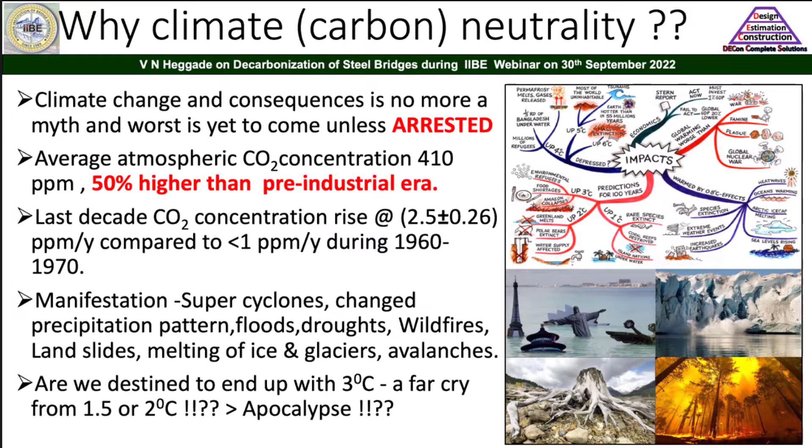So all of us have to get geared up and overcome this problem of carbonization, which is leading to global warming and thereby these disastrous manifestations. How to avoid that? We'll have to work on that. Now, let's have a look at carbon dioxide emission to the environment. The data varies across the world; different sources give different data. We are particularly concerned about the construction sector.

If you collect the data all over the world from different sources and average it out, around 12.75% can be attributed to the construction sector, out of which cement contributes around 3%, steel around 2.75% to 3%, other building materials 1.25%, and utility, end of life and beyond, around 5.75%. In addition, energy used in buildings for operation, like water supply, vertical lift movement and so many things, contributes to the carbon footprint, meaning carbon emission to the environment, of 17.5%.

In the world, India ranks almost third in emissions. If you look on the right hand side, China ranks first, the United States ranks second, and India comes with 6.6% of overall carbon dioxide emission to the environment. You can have a look at it. But per capita, the carbon dioxide emission as well as the energy consumption in India and China is lower compared to that of the United States, because our population is very high.

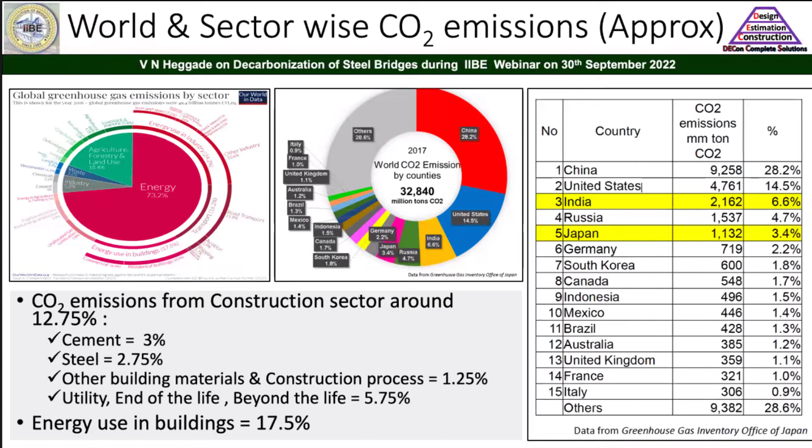So if you look at the per capita, it may not be very high, but if you look at the absolute gross carbon dioxide emission, India ranks at around third in the world. I think it's a matter of concern for us.

But those commitments, which were made in COP 21, were revised in the next meeting which took place in 2021 in Glasgow, that is called COP 26, where our Prime Minister very famously gave the Panchamrita, that means 5 panaceas to carbon neutrality, to achieve carbon neutrality by 2070.

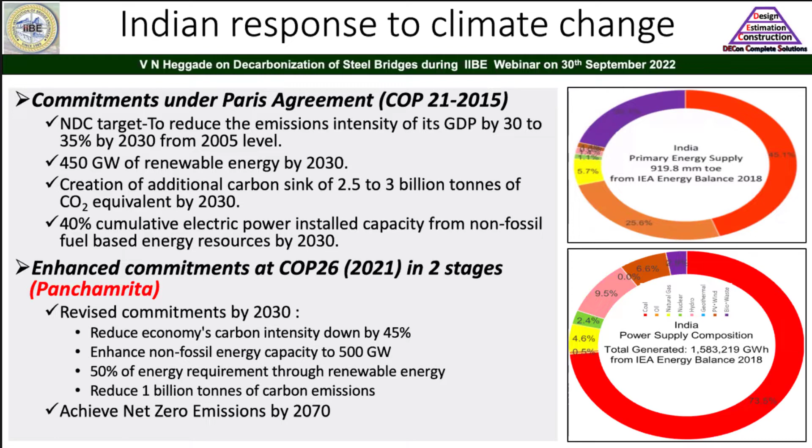And those 5 panaceas are here, like reduce the economy's carbon intensity by 45%, and he proposed it in 2 phases. In fact, by 45% in the first phase, that is by 2030, and complete carbon neutrality by 2070. This is overall from the Indian perspective. It's not only meant for the construction sector, it's for all.

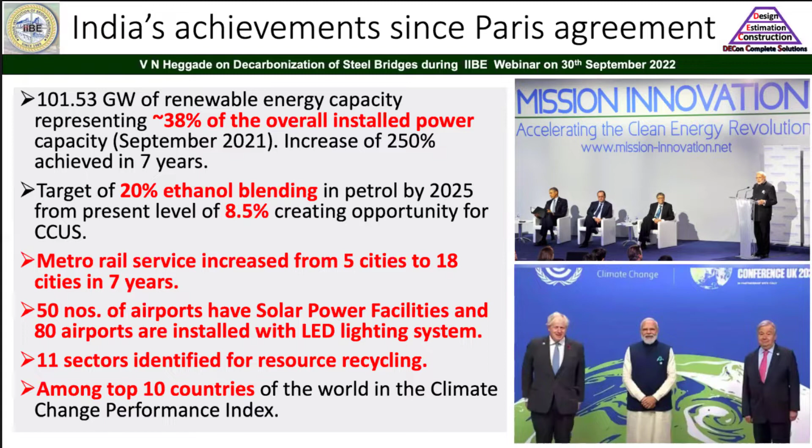But very interesting and very exciting for our Indian subcontinent is that whatever we had promised in Paris, that is in COP 21, we could make quite a lot of progress in the achievement of carbon neutrality. And we ranked among the top 10 countries in the world. I think that's a credit. And India is on the right path of achieving carbon neutrality as committed by our Prime Minister by 2070.

Now let me give the background, because before getting straight into how to decarbonize steel bridges, let us understand what we are talking about, carbon emission. What does it mean? There are 2 types of carbon. One is called the operational carbon, and another is called the embodied carbon.

Carbon emission or the global warming potential has always been expressed in terms of kg carbon dioxide equivalent or ton carbon dioxide equivalent. Along with carbon dioxide, there are other greenhouse gases like CH4 and N2O, etc. But the majority of greenhouse gas emission, almost around 90 to 95%, is carbon dioxide.

So most of us will be concentrating on the carbon dioxide emission rather than CH4 and N2O. That is the emission which takes place into the environment, which can cause global warming. So 1 kg carbon dioxide emission to the environment has the global warming potential of 1 kg carbon dioxide equivalent. That we'll have to understand.

Now, as I told you, there are 2 types of carbon. One is the operational carbon, another is the embodied carbon. Operational carbon encompasses carbon dioxide emission, which is always equivalent to greenhouse gas emission, you have to understand that, from energy-centric operations in buildings such as heating, cooling, ventilation and lighting systems. These are called operational carbon.

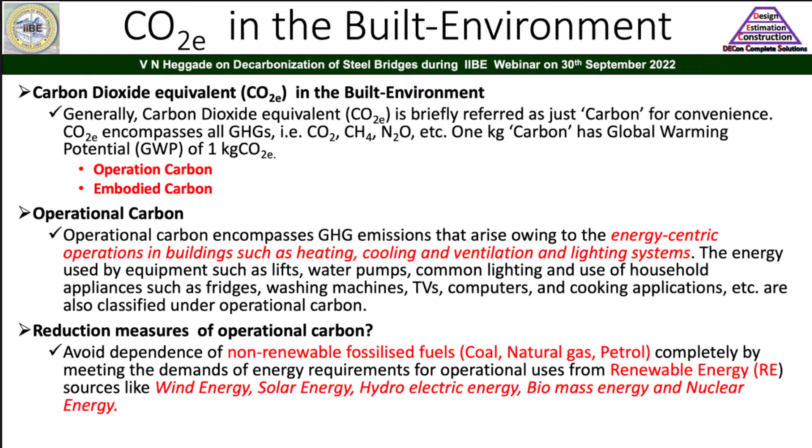In particular, this energy sector is quite ahead in addressing this carbon neutrality issue all over the world, in my opinion. And there's a lot of debate going on about how nuclear energy can be made cheaper compared to the energy being produced by thermal power plants these days, and how solar energy and wind energy are a little bit expensive compared to the fossil fuel, non-renewable energy which is being produced right now. But research is going on as to how to make it economical. A lot of work is being done.

In most of my presentation today, when we are talking about the decarbonization of steel bridges, I'll be most of the time concentrating on this embodied carbon, because 50% of the embodied carbon emission takes place at the product stage itself. When you say the product stage, that means manufacturing of the steel itself, manufacturing of the cement itself in case of the concrete.

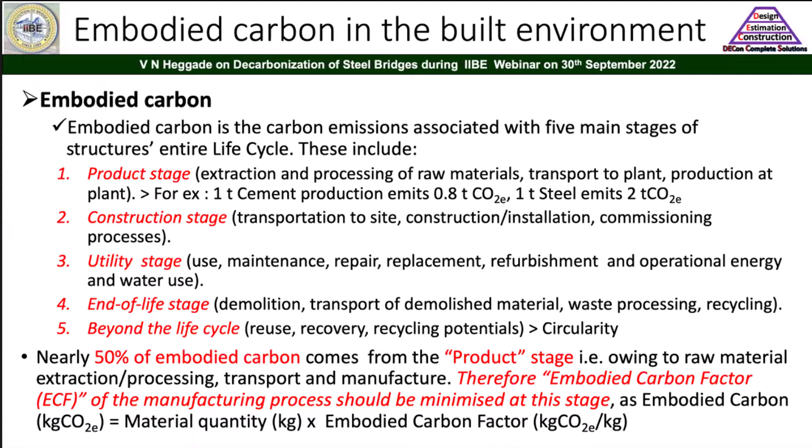If you can somehow control that embodied carbon during the product stage as well as the construction stage, we will be able to achieve carbon neutrality by 2070 as committed by our Prime Minister, and that is our aim when we are talking about the decarbonization of steel structures or for that matter the construction industry itself.

Carbon neutrality is a process where carbon dioxide emissions are brought down to net zero by avoiding and reducing, and where avoiding and reducing is not possible, by setting off. That is the process of carbon neutrality achievement. Basically, that's how we do it. First of all, we'll have to calculate. When I say estimate, we'll have to calculate what is the embodied carbon and what is the operational carbon. That calculation has to be done.

Unfortunately, in India, that calculation process still has to take place, and there is no agreed or consensus embodied carbon coefficient or embodied carbon factors, so the estimation still has to be done. A lot of work is going on. People are working on that. We'll have to do that.

Then once you estimate it, avoid those sorts of activities which emit carbon dioxide to the environment. That is the avoid. But you know that construction materials like concrete as well as steel are a necessary evil. We cannot completely avoid that. And when it is not possible to avoid that, we have to work out how to reduce this carbon dioxide emission using the same concrete and steel. That's what we'll have to work out in the third phase.

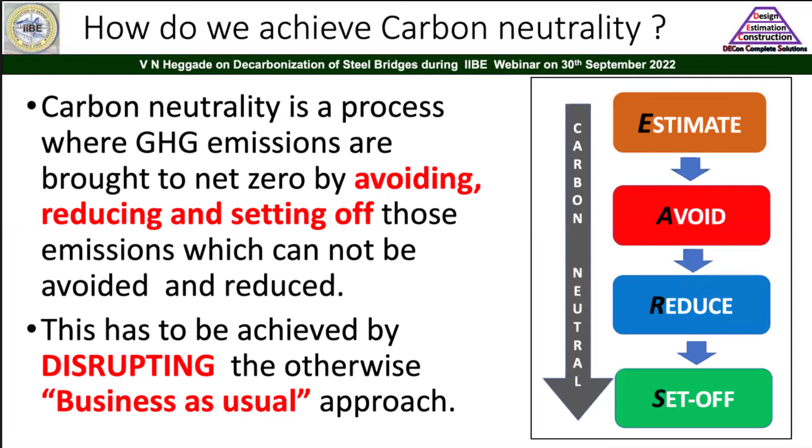As I told you earlier, it's not possible to avoid concrete construction or steel construction. It's a necessary evil, because infrastructure is very much essential for us, and it's a basic building material for us. We'll be discussing the strategies of reduction later, but some emissions cannot be avoided at all. So what cannot be avoided, those carbon dioxide emissions have to be set off. That whole package, or model, is called the carbon neutral model, as you can see over here.

And also ISO as well as EN 15804 has come out with core rules for the product category, especially under environmental performance criteria. These core rules for the product category are called environmental product declarations. I think that's very, very important. On the basis of the environmental product declaration, the green certification, etc., normally takes place. I think that is how it is.

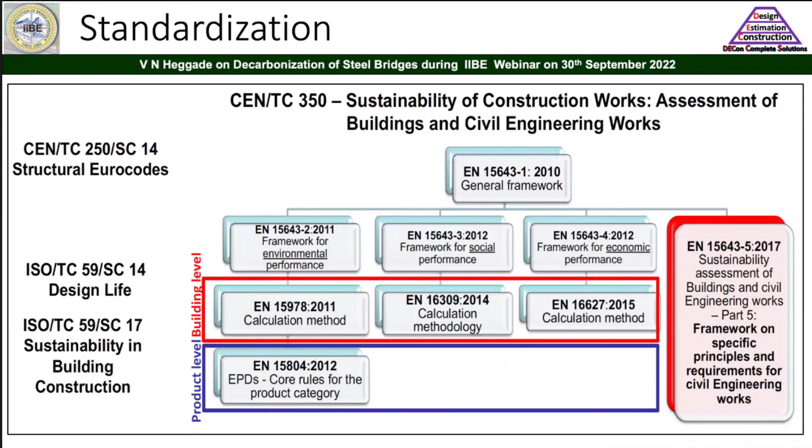So the standardization is very much there, and this standardization has come out long back. If you really have a look at it, 2010, 2011, 2012, 2015. So it's a work in progress. People have been working all over the globe on the standardization of sustainability for quite some time, which we from the Indian subcontinent will have to really catch up with.

In case of steel, how steel is manufactured. In case of concrete, how the concrete is manufactured. I'm talking about concrete as well as steel because they're the major carbon emitting building materials which have been used all over the world, even in India for that matter.

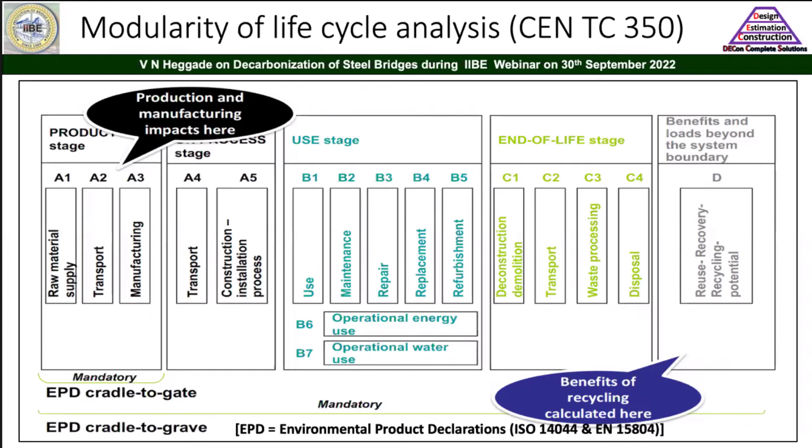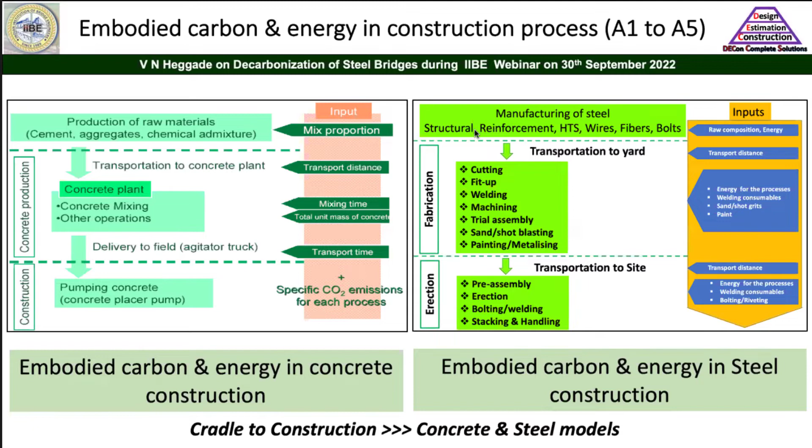Also, the cost incurred. So the assessment at that stage for the environmental assessment, the global warming potential assessment, as well as the economic assessment can be made for both these stages. So we will be basically concentrating on the right-hand side model, that is related to steel bridges. Now coming to steel bridges, let us understand how much carbon dioxide emission is taking place because of steel bridges.

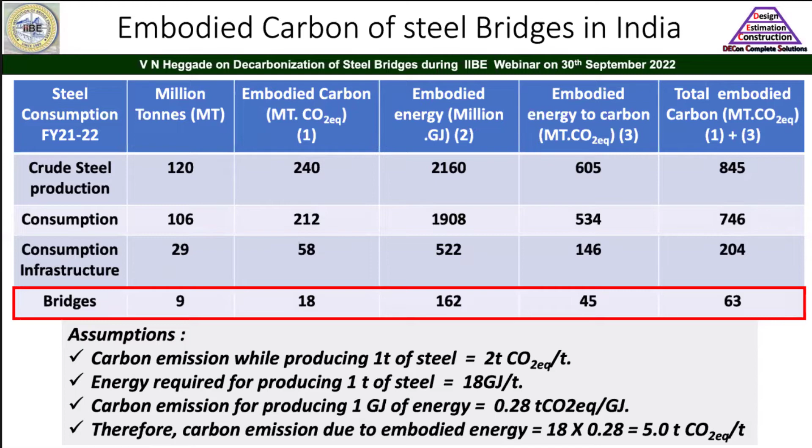And concluding, I think most of our emphasis has to be on how to replace that energy with renewable energy resources. That is what is very important as far as steel is concerned, if you want to make steel carbon efficient going forward.

Third is reduction at the production stage itself. Direct emission of carbon dioxide takes place while producing the steel; around 2 tons carbon dioxide equivalent is emitted for producing 1 ton of steel. That has to be reduced. And also decarbonizing energy. We know the energy required to produce 1 ton of steel is 18 gigajoules, if you take it on a lenient side. That means around 5 tons carbon dioxide equivalent

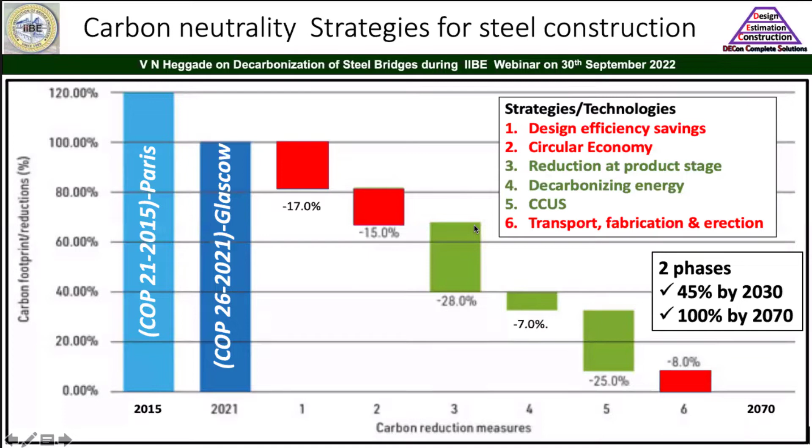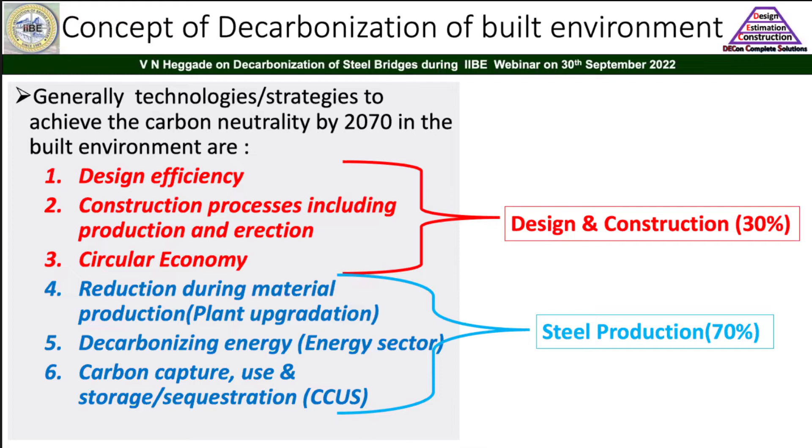By doing that over the period up to 2070, it's possible for us to achieve this. Design efficiency is in our hand, construction processes including production and erection are in our hand, and to a certain extent the circular economy is in our hand. Basically, whatever comes out of this can be recycled and reused. These are the three things which are in our hand. Only 30% carbon neutrality achievement is in progress.

Basically, slag has to be used as much as possible. In fact, in concrete itself, up to 85% slag can be used, and there are slag aggregates also that can be used. Recycling glass residue as lightweight aggregate, replacement of OPC with mineral admixtures like slag. As I said, slag is an industrial byproduct of steel making. Going for HPC, HSC, high-grade steel for enhanced sustainability, self-compacting concrete, UHPC along with HTS, and the design-build contract type. In the design-build contract type, it is possible for us to do value engineering as well as carbon engineering.

And very importantly, the role of the owners as well as the architects and other engineers preparing the DPR: they have to specify limits for carbon dioxide emissions and energy consumption in the contract itself, with stringent penalty clauses for exceeding them. Also, the QCBS methods used for contracting and procurement have to have the carbon footprint as one of the major criteria. A lot of emphasis has to be given to that. The owners, architects, DPR consultants, and contract formulators have a lot to do as far as this is concerned.

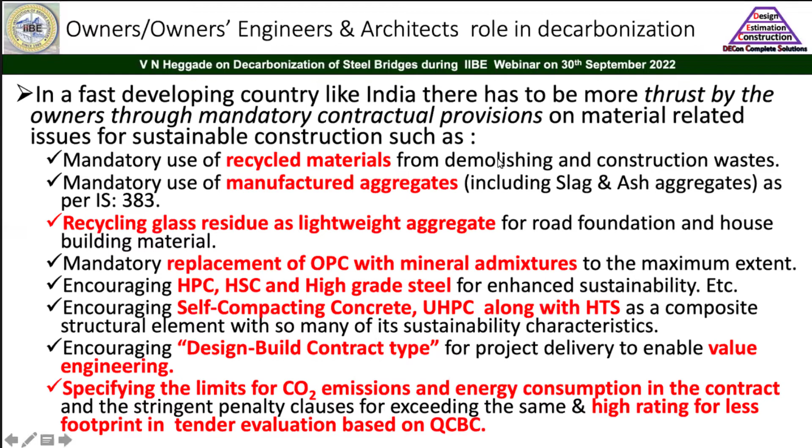Now, as I told you, in concrete construction, if you want to achieve carbon neutrality, one of the ways is replacing cement with mineral admixtures. In one cubic meter of concrete, if you really look at it, cement contributes 90% of the carbon dioxide emission. So the carbon in the environment can be reduced by replacing OPC, ordinary Portland cement, with mineral admixtures like fly ash and slag.

And slag is an industrial byproduct. Why I'm talking about slag here is that slag is an industrial byproduct of steel making. We are talking about steel decarbonization, and it's possible to replace OPC in concrete by up to 85%; in the world it has been replaced up to 85%. And nowadays we are allowing, even in IS 383, the use of slag aggregates.

I think it's been permitted only 10% replacement of the natural aggregates. I think we should allow up to 30 to 40% of the slag aggregate, and also slag has to be processed in the plant itself in such a way that it can be used in the concrete production.

So the only thing is, the debate is going on for the carbon credit for this. Like use of slag, whether it has to be given to the steel industry or to the concrete industry, the debate is on. But I think it's a byproduct of the steel. I think perhaps it's better to give the credit, in my opinion, to steel manufacturers over here.

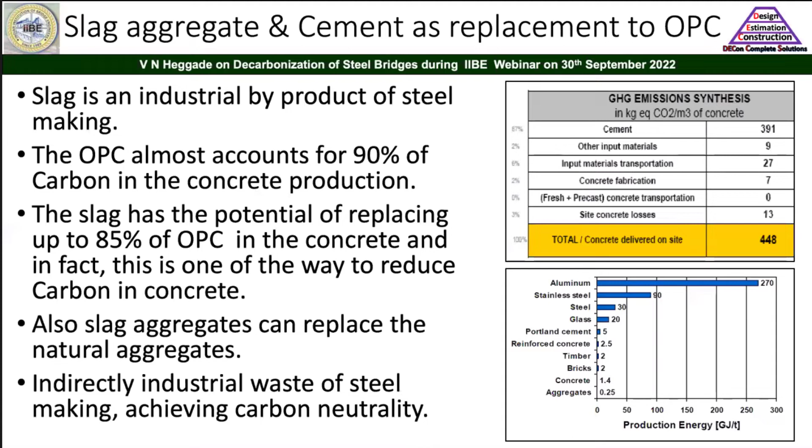Another thing is the designer's responsibility by value engineering during the engineering as well as the design. Normally, for any project, the value of a project is created at the design and engineering stage itself, up to 75%. And during this design engineering, normally if value engineering can be done, up to 10 to 15% saving is there; 15 to 17% of the cost can be reduced.

Similarly, this concept of value engineering at the design stage can be expanded to carbon footprint reduction, what I call carbon value engineering. In fact, luckily for us in the construction industry, when you make these structures economical by adoption of value engineering, automatically carbon value engineering also takes place, because the whole idea of value engineering is to reduce the mass of the building material itself in the project.

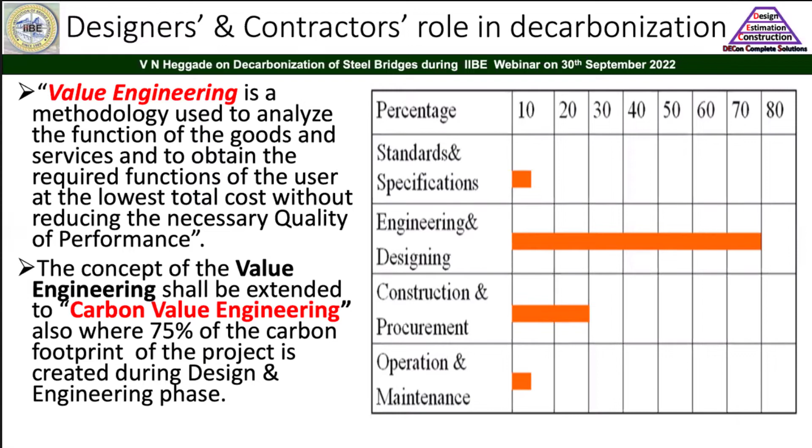If you are able to reduce the building material quantum in a particular project by value engineering, I think we'll be achieving carbon footprint reduction to a large extent. This is one of the ways, and we'll have to emphasize carbon value engineering going forward. It's not just value engineering for reducing the cost. That's very, very important in my opinion.

Let us look at some of the sustainability characteristics of steel bridges. There are a lot of myths as far as steel structures are concerned. They feel that they are not durable structures, not elegant looking structures, and also that they are maintenance prone, requiring a lot of maintenance. But the facts, the statistics all over the world, not only in India, prove the other way around.

If you really look at some of the bridges which have been lasting for a long time in India, the Abdul Bari bridge, opened in 1862, a steel double-decker bridge, as you can see here, is still serving the purpose. It's a railway bridge, of course. And then Old Naini Bridge, opened in 1865, is still serving. More than 150 years, it has been going strong.

I have not come across any prestressed concrete bridges which have been serving more than 100 years. Of course, prestressed concrete technology has only evolved in the last 60 to 70 years. It has not seen the test of time. But still, if you really look at it, some of these bridges have been lasting for a long time.

Another bridge is Malviya Bridge. There are many bridges in Bihar as well as UP, especially railway bridges. In fact, it's a double-decker bridge, a multimodal transport bridge on the same substructure as well as foundation, as you can see here. Another is the Pamban Bridge in Tamil Nadu, opened in 1913. So if you really look at those bridges, the myths are exploded. The myths are myths only.

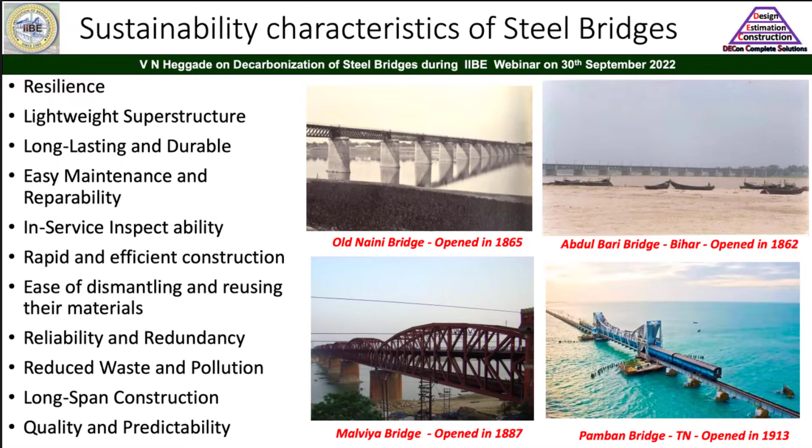So they have been long lasting, and these steel bridges have highly sustainable characteristics compared to their counterpart concrete bridges, if you really look at it. And also, see, some of the studies which have been done by Garg et al.

He studied the bridge collapses during construction, as you can see on the screen here, from 1977 to 2017. It is interesting to note that out of the studies he conducted, 86% of the bridges which collapsed during construction were either RC bridges or pre-stressed concrete bridges, whereas steel bridges were only around 13%. That too was basically because of the collapse of the scaffolding.

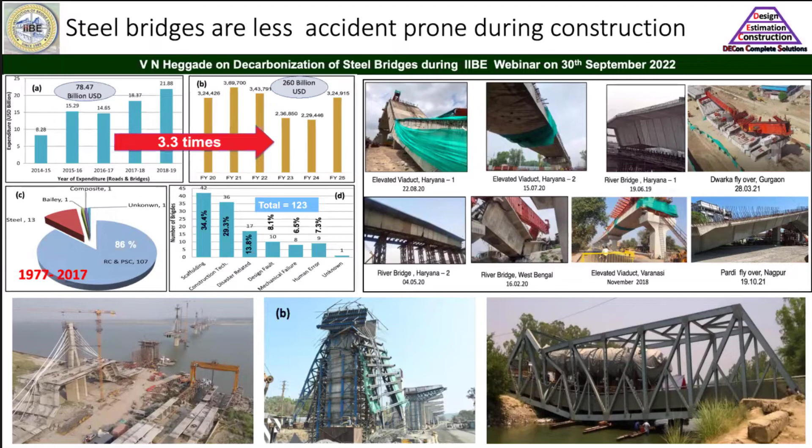And it is not that there are no steel bridge failures during construction, as you can see down here. This is a cantilever collapse when the concreting is going on, and the scaffolding collapse here at the right hand bottom is because of overloading. But it looks from the statistics that steel bridges are less prone to accidents during construction compared to their counterparts, RCC and concrete bridges. So it's less accident prone.

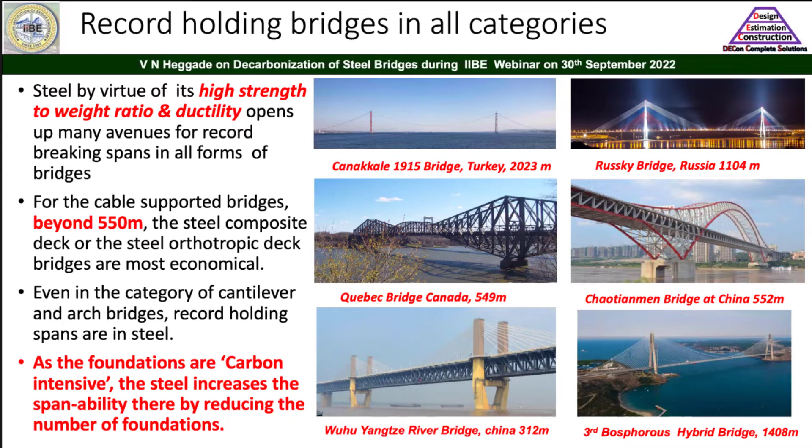One of the advantages of going for long spans, especially in creeks, seas and rivers, is that it reduces the foundation. Studies show that foundations and substructures in rivers and creeks are highly carbon intensive, and highly uneconomical also. So it's necessary to reduce the foundation. The ability to increase the span by using steel structures reduces the foundation. As such, carbon emission to the environment also gets reduced, and it helps in achieving carbon neutrality.

Another myth is that steel structures look ugly, like the trusses and those sorts of things. It's possible to have wonderful, elegant looking bridges like the Namaste Signature Bridge at Delhi. I named it the National Namaste Signature Bridge because it has a Namaste pose welcoming the onlookers, it is a signature bridge, and it is in the national capital. It reflects the local culture and tradition in its visual form.

Another bridge, Atal Bridge, recently inaugurated by Mr. Modi in Ahmedabad, reflects the kite culture of Ahmedabad. Another bridge at the bottom left, the Deccan Foot Over Bridge in Pune, reflects the Puneri Pagadi, the Pune Pheta, as they call it. The third is the Sambhaji foot over bridge, which will come up in Pune again.

It reflects the Tanpura. Bal Gandharva Hall is nearby to this, where Bal Gandharva used to sing and the Tanpura used to be played along with his singing. That sort of cultural reflection is there. So steel structures, steel bridges, could be highly elegant and aesthetically pleasant.

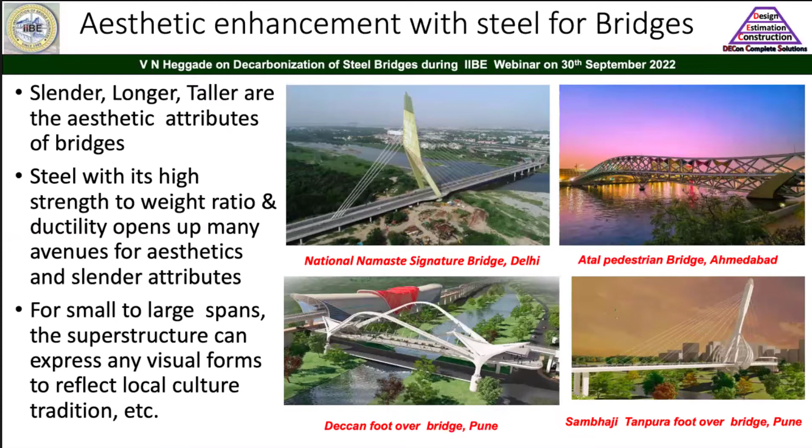Something is there in the aesthetics as well as the elegance that is always associated with sustainability. I'm not able to really pinpoint what that factor is which makes aesthetically looking bridges more sustainable. I think some relationship is always there between aesthetics and sustainability, though it is not possible to really quantify that, in my opinion.

As I told you, fewer accidents are taking place during construction in the case of steel bridges, but though it is less, many accidents are taking place because there are not sufficiently trained designers in the market, and academic institutions are not giving much importance to the design and construction of steel structures. The number of credits in engineering colleges is quite less. The emphasis is always given to concrete structures.

Perhaps there's a need for us to look into the engineering subjects. The academia has to concentrate on that. Another aspect: as far as concrete is concerned, concrete technology has been well taught in the universities. But when it comes to steel, it involves fabrication technology, the steel is already prepared and given, and the composition of the steel, the manufacturing technologies of the steel. I think structural engineers also have to be taught this. Presently, the fabrication and processing of steel, manufacturing, is only taught to mechanical engineers, if I'm not mistaken.

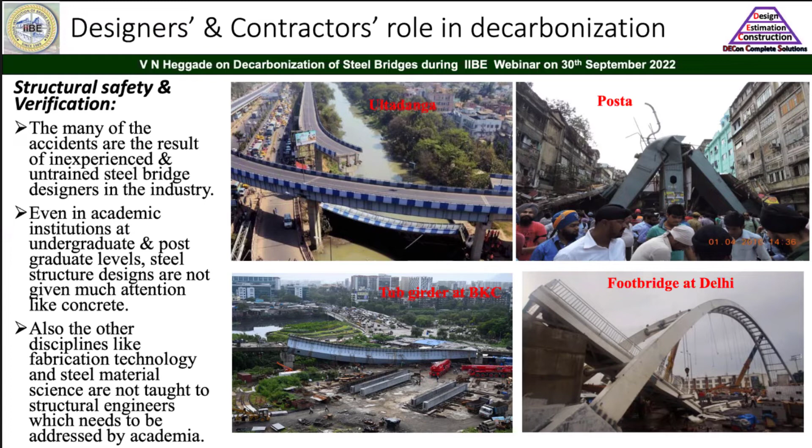Perhaps there's a need for us to strengthen the education in steel designing, steel fabrication processes, as well as steel making itself. If it can be taught extensively in engineering institutions, and we can also train steel designers professionally, I think it will go a long way in really stopping these accidents which have been taking place, though it's not as much as in concrete bridges. Another aspect is the double-decker structural systems for decarbonization.

Whenever you are going for long span bridges all over the world, especially the Chinese, if you really look at it, we have the Bogibeel Bridge and also the Patna Bridge, which was talked about while Dr. Harshavardhan Subbarao was being introduced. There are a number of double-decker bridges, in the sense multimodal: rail as well as highway run on one single bridge, on the same foundations. I think it's a more sustainable way to go about it. I think steel as a material enables it much better than concrete. From that point of view, it's a structural system for the double-decker system.

In recent years, even the cable-stayed bridge which is under construction, the Changtai Yangtze River Bridge, is a double-decker bridge which allows rail traffic as well as road traffic, and it's going to be 1176 meters, which is going to break the record of the Russky Bridge. Whatever long span bridges have been constructed in China these days, most of them are double-decker. I think it makes sense.

And for me, it is inexplicable that the Trans Harbour Bridge, which has been going on in Mumbai for almost 10 kilometers, doesn't have a double-decker. I think it would have been a very good idea to have a double-decker bridge. It's a highway bridge right now, and after some time, the public policy makers will have to come out with another metro line over there. The whole work of the foundation has to be repeated. I think policy makers also have to be oriented towards carbon neutrality.

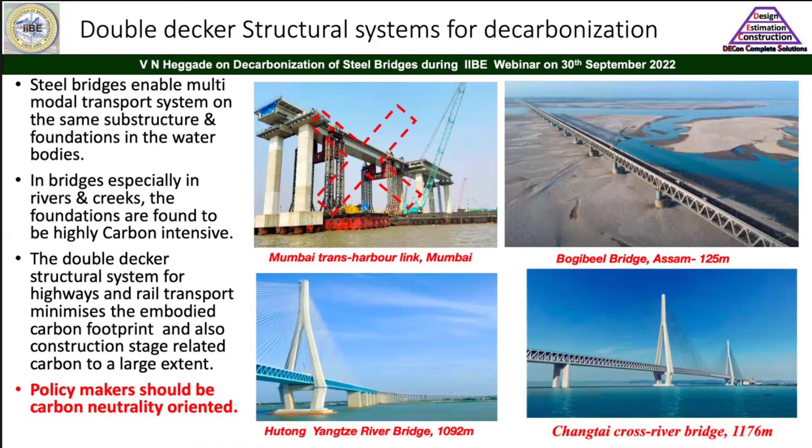In a nutshell, I would like to say that steel gives the better option for the double-decker system for bridges. From that point of view, it's a more sustainable construction material. In China, again, the arch form has been used, especially the composite arch, in the sense the concrete-filled hollow section. The arch bridge holding the record for the longest span arch bridge in China, in the world in fact, is 575 meters.

This kind of long span arches is made possible by use of these concrete-filled tubes, basically the high tensile steel tubes filled up with high strength concrete, high performance concrete, and the spanability is increasing. Going forward, I think it's not only 575 meter; now with the advent of ultra high performance concrete, and also steel with strength of 1000 MPa, perhaps the combination of these two will lead to much higher span arch bridges with CFT, the concrete filled hollow section tubes.

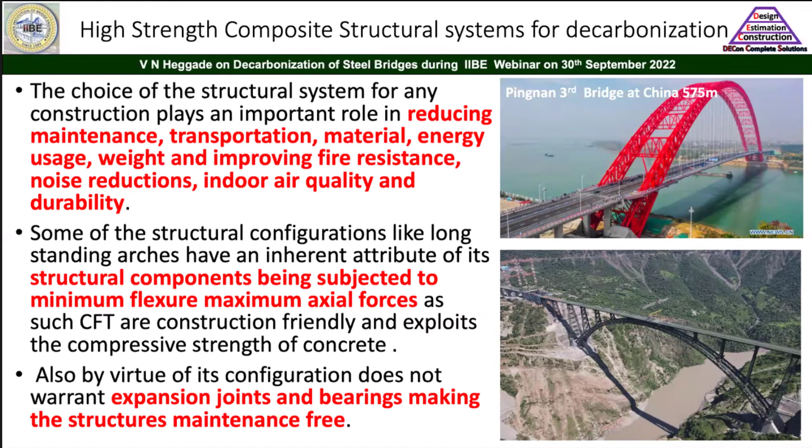So this kind of structural system with the combination of ultra high performance concrete as well as ultra high tensile strength steels will give a lot of sustainable options for the steel bridges too. This is for the bridges, buildings. I'll just skip this slide.

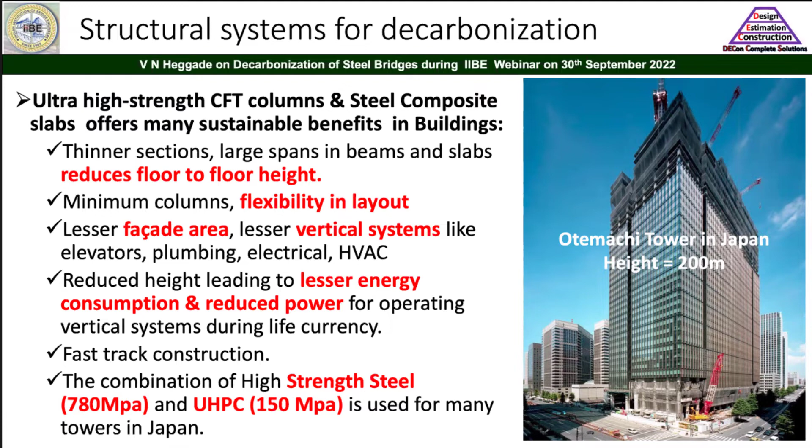Even in the buildings, the composite columns, which have been extensively used in Japan, with the combination of 150 MPa ultra high performance concrete as well as 780 MPa high strength steel, make it possible to increase the space inside, and the facade area is reduced, and so many advantages are there. Sustainable options are there, but it's in the buildings, not in the bridges, so I'll just skip.

How designers can save by design efficiency: use of very high strength steel and concrete to reduce mass, different types of steel, stainless steel, weathering steel, high strength steel, and the detailing category for fatigue. If you're going for a welded connection detailing category, normally the section requirement is high. I think as far as possible, it is better to avoid the welded detailing categories and go for the bolted detailing categories, where the steel sections can be reduced, and standardization and modular construction can be used for waste reduction and fast construction.

Pre-stressing in steel bridges to reduce the quantum of the steel. I think it should be explored more and more going forward. Pre-stressing can not only be used for concrete, it can also be used for steel trusses. I think going forward, we should use that option. Use of composite construction, I explained that.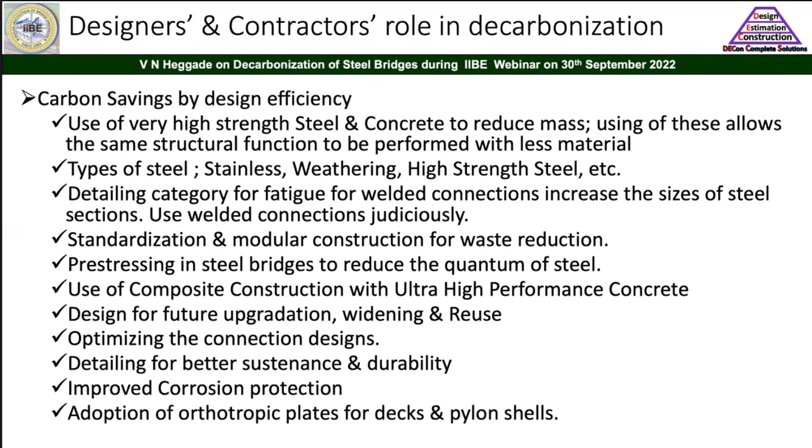Design for future upgradation, widening as well as reuse, optimizing the connection details, detailing for better sustainability as well as durability, improved corrosion protection, adoption of orthotropic plates for the decks and the pylon shells. When the pylon is made of steel, even the shells of the pylon can be made with orthotropic plates, as with orthotropic plates the quantity requirement is found to be less.

The carbon efficiency by high strength steel is not a new phenomenon. In fact, I don't know whether Mr. Ghoshal Saab is here, this has been taken from his book: the Howrah Bridge, constructed in 1943, shifted over to high tensile steel from the original design of a normal steel of 250 MPa. It seems to have achieved a 10,000 ton reduction in the steel itself.

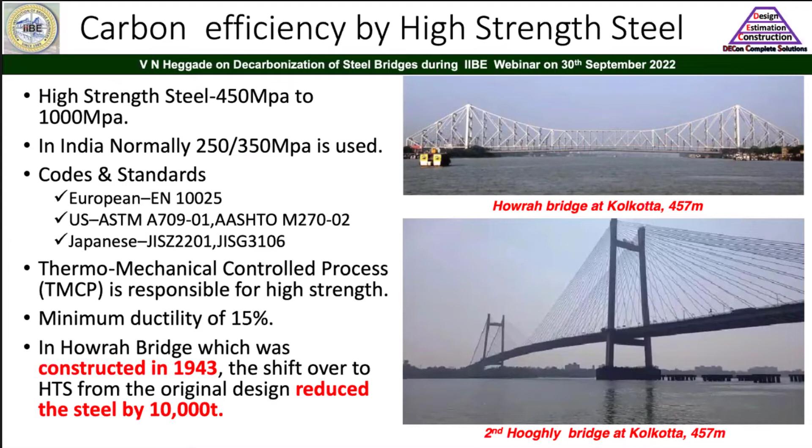Another option, especially in the coastal area, where durability of concrete is a concern, perhaps it is better to go for stainless steel. One example is the foot over bridge you can see here, which has been done in Visakhapatnam. I think MORTH is coming up with a policy to make use of stainless steel mandatory in areas close to the sea. That seems to be a good option from the carbon footprint reduction point of view, especially since the maintenance requirement is less.

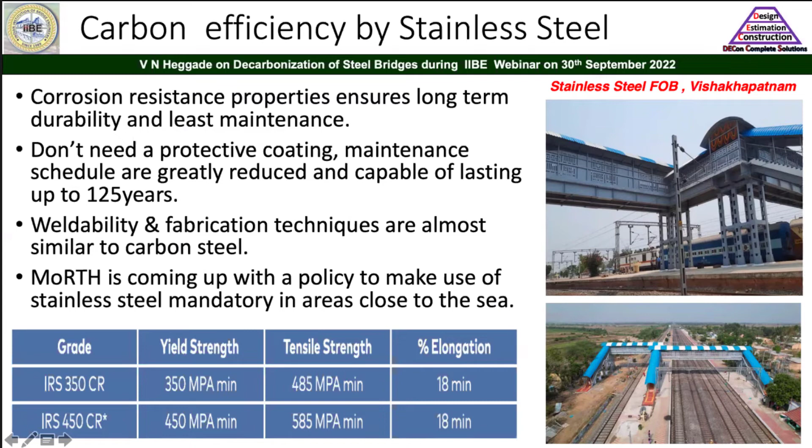But the only thing we'll have to be watchful of is that for producing stainless steel, using the current state of the art, the energy required is 50 to 60 gigajoules per ton of production. Unless this energy requirement is replaced with renewable energy sources, carbon intensity wise it's not going to be a carbon friendly product. Only from the maintenance point of view it may be, but unless this energy is replaced with renewable sources, stainless is going to be carbon intensive. Another option is weathering steel.

I think even by going to weathering steel, it's possible for us to really reduce the maintenance requirement. Normally a dense and sticky layer of rust forms on the top of this kind of steel, and it will take some time for its formation. This rust resists ion penetration into the steel and initiation of the corrosion process, and these bridges can be designed, in my opinion, up to 150 to 200 years with weathering steel, but the rust thickness requirement may be more. Accordingly, it has to be designed.

There are some examples, one done in 1989, the Okuaso Bridge, as you can see here, and also the Konstanz Cycle Bridge. There are several examples. In the initial stages the rust formation may look different, but over the period it becomes a dark brown color, as you can see here in the right hand top corner of the slide.

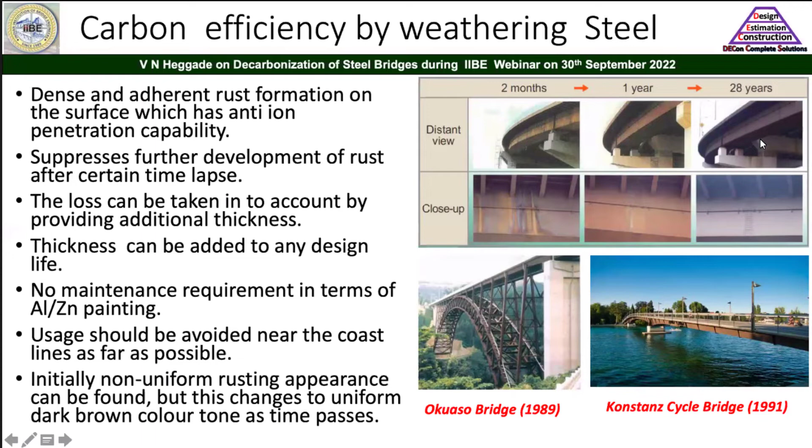Another carbon efficiency technology is modular bridges, which has been discussed in our B5 committee. I think it's good that the convener of the B5 committee, Mr. Puri, is among us today, and we will be able to bring this out also. It enables very fast construction and reduces wastage, and with fast construction the traffic congestion is reduced. Traffic blockade will not be there for a long time.

In these cases, modular bridges, the panel bridges, are faster to assemble and simple to launch, of panel length, and they can also be said to be carbon efficient bridges. And there are patented ones. One is Acrow, and there are many, in fact.

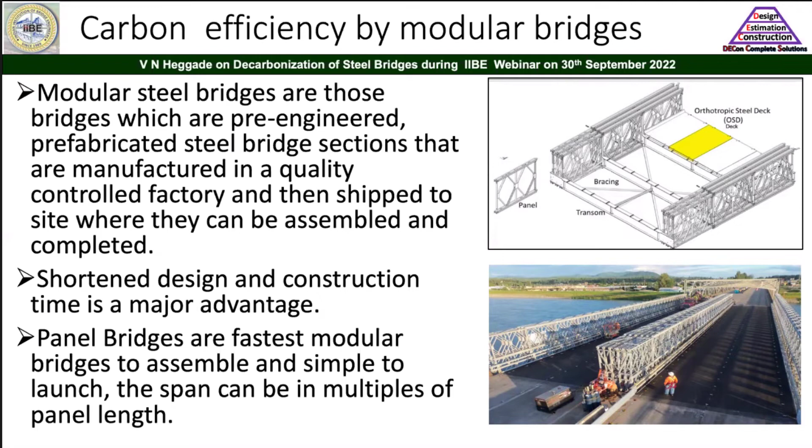Also, the steel in the decks as well as the pylons, as I told you, can be reduced by going for the orthotropic plate system. As you can see here on the right side, in the transverse direction as well as the longitudinal direction, they will have different properties. Basically, with the orthotropic plate, here you can see a longitudinal girder. This is the cross girder, and again there are several longitudinal girders over here.

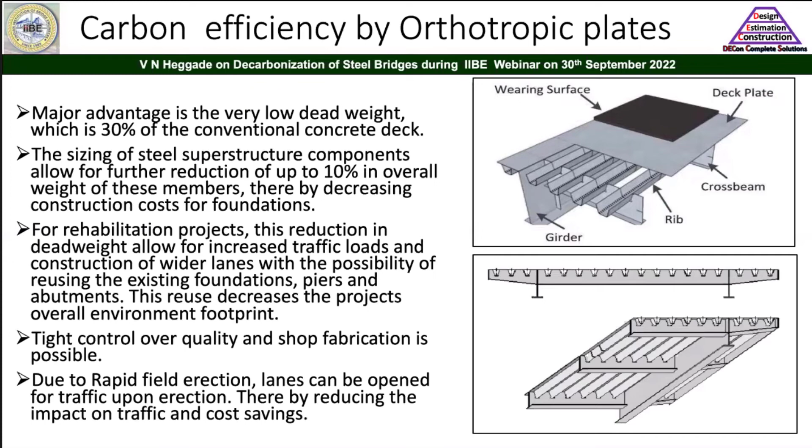It's possible to reduce the weight of the steel. When the weight of the superstructure is reduced, in turn the foundation weight is also reduced, and it is possible to have a carbon efficient solution by use of these orthotropic plate solutions too.

In my opinion, the most important thing is the role of the standards and the code makers in decarbonization. In the case of steel bridges, it is particularly the B5 committee which comes into the picture, and they have been bringing good guidelines. The tub girder guidelines are going to be approved by the council shortly, and there is a need for extradosed as well as cable stayed, especially cable stayed, where the composite deck for long span cable stays is invariably required, especially when you're going beyond 550 meter span. Cable stayed bridges are normally not only economical but even carbon efficient with the composite girder deck.

In fact, beyond 700 meters, you will have to go for the orthotropic plate deck, which is steel, and on top of that, as I explained, you will have to have the wearing course, which is directly laid on top of the orthotropic plate, and that's how normally the work is done.

Very important is the review of safety factors to make the structures less carbon embodied. The safety factors as well as the load factors used for concrete need not be used for steel structures. Basically, what are the safety factors? When you talk about the load factor, in concrete as a material, variation in the density is possible, and casting imperfections are possible. When you are using steel structures, steel plates, variation to that extent is not possible. So it's necessary for us to really look at these load factors, especially for steel structures.

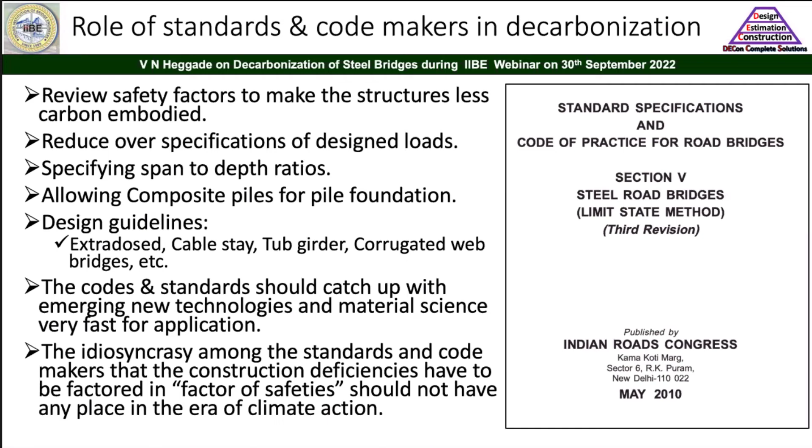If the people are not doing proper work, those people who are responsible for getting the work done have to get the work done properly. That is where the concentration has to be, rather than having an idiosyncrasy. To cover up the workmanship, we increase the factors of safety, which makes the structure carbon sensitive, in the sense carbon efficiency is lost by increasing the factor of safety. I have seen that happen during the codal committee meetings. Sometimes it may come even from me, but we'll have to get out of those idiosyncrasies.

Then how do we reduce the carbon footprint during transportation, fabrication, and erection? The only way, I think, is to replace the energy source. I consider around 8% of carbon emission in steel bridges takes place due to transportation, fabrication, and erection. That is my study, but it may vary quite a lot depending upon the various studies. And that has to be reduced. That can only be done by use of renewable energy, especially biomass energy and solar energy.

Wherever it is possible for us to have solar energy, biomass energy, wind turbines and wind energy, it's possible to get those energy sources to replace the non-renewable energy sources which are presently used. I think that's the only way to reduce the carbon footprint during transportation, fabrication, and erection. And also some carbon efficient fabrication technologies using digital technologies can be used.

Renewable energy, as I said, LED lighting can be used, reduction in compressed air leaks and gas systems can be made, power optimization, use of inverters, new generation welding sets, hybrid and electric vehicles for the transportation of materials inside the casting yard and the fabrication yard itself, and waste minimization, including consumables waste. These are some of the methodologies which can be used.

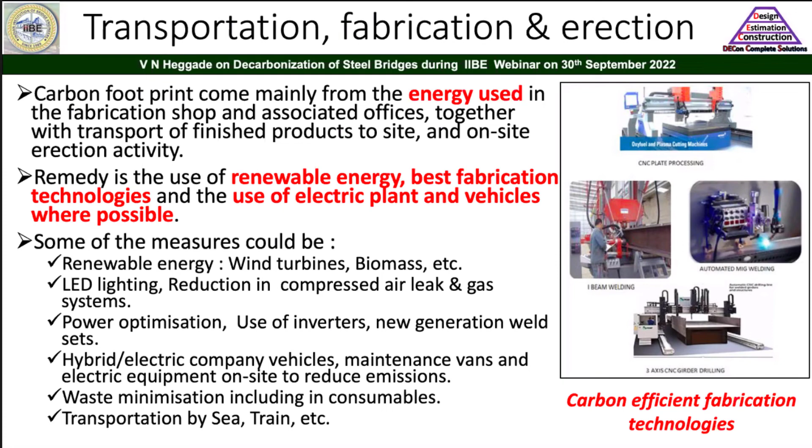Of course, when the material has to be brought from the steel manufacturers to the site for fabrication, we'll have to evaluate which transportation, whether by sea, train, or road, is economical and less carbon intensive. That has to be studied, and then we'll have to decide. These are some of the methodologies during transportation, fabrication, and erection. Finally, I'll come to the circular economy and look at the steel structure.

I think the steel structure is truly compatible with the circular economy models, because it is recyclable and it is fast constructable. All the steels, whether it's a stainless steel or a weathering steel or a normal, lower strength steel which we have been using, what we call carbon steel, all these steels are recyclable, and they can be used once again. So from that point of view, I think structural steel as a material is utmost compatible with the circular economy models. And here is one of the cases.

It's a very versatile and a very flexible material by virtue of its high strength to weight ratio and also the ductility which it has got. Basically, this is one of the examples where the bridge, which was constructed using pre-stressed concrete technology, of course the state of the art at that particular point of time, has deteriorated over the period.

The superstructure started sagging because of what we call the creep phenomenon, the long-term creep phenomenon. And it is not because of corrosion, as has been said in many forums. It is particularly because of the long-term creep phenomenon. Also the central hinge, which was in vogue at that particular point of time, caused the sagging in this particular case. And always in long span bridges, as I explained, the foundations are more carbon intensive. Not only more carbon intensive, it is highly uneconomical to do the foundations in the river.

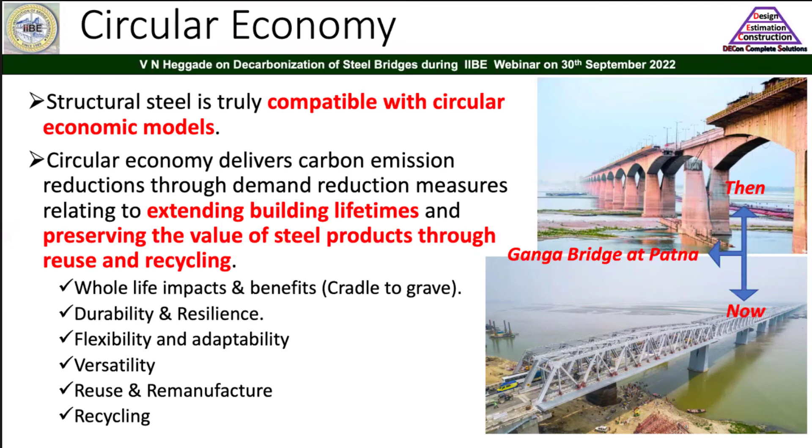Here's a particular case where the concrete superstructure is replaced with a steel truss superstructure, as you can see here. So it can be used for prolonging the life of the existing structure itself, making the existing structure less carbon intensive. So steel is highly oriented to the circular economy model.

When we are talking about the life cycle assessment of bridges, whether economically, global warming wise, or social impact wise, we have got four different boundaries, as you can see here. There's the product stage, the material production stage, what we call the A1 stage. Then the bridge construction stage, that's another boundary.

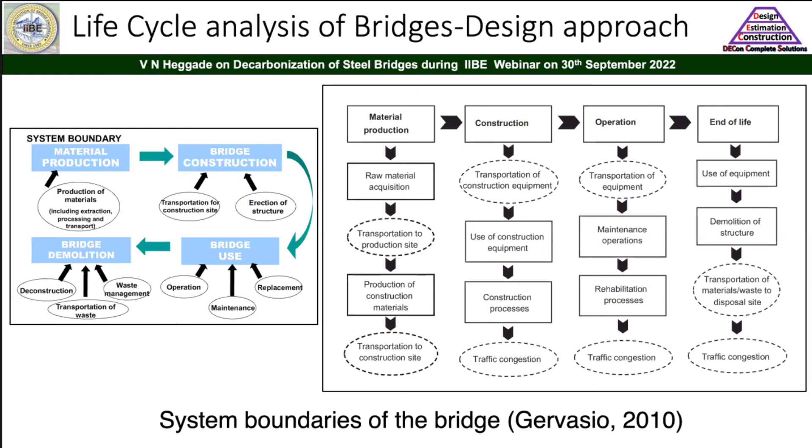Then the bridge use stage, where the maintenance of the bridge has to take place, where the expenditure takes place financially as well as socially, and also global warming takes place, all during this stage. Even for the fourth stage, the bridge demolition stage, it is possible for us to do the economical assessment, environmental assessment, as well as social impact assessment, as you can see here.

Now, during the maintenance phase, or the operation phase, what is normally done in the life cycle assessment is, for example, here you can see around 100 years. Suppose a bridge is designed for 100 years. That is the life which we design the bridge for as per the Indian codes. And if we design the bridge for 100 years, the surface of the deck has to be replaced once in 25 years and once in 75 years.

This could be the maintenance regime which you can define: rehabilitation of the deck can take place once after 50 years in the analysis or the life cycle assessment, and a new surface, for example, steel beams protection. It can be done at 25 years, we can specify 50 years and 75 years. And equipment used, cleaning of the expansion joints, I think it has to be continuously used, as you can see here. Only in 25, 50 and 75 it is not done. Otherwise, it is continuously required.

When you are using this equipment, normally there is the environmental impact, social impact, as well as the economic impact. All assessment has to be done during the operation period, as you can see here. The bridge is also normally designed taking into consideration the average traffic study, average traffic details, as you can see here, how the traffic fluctuation on the bridge takes place in a day.

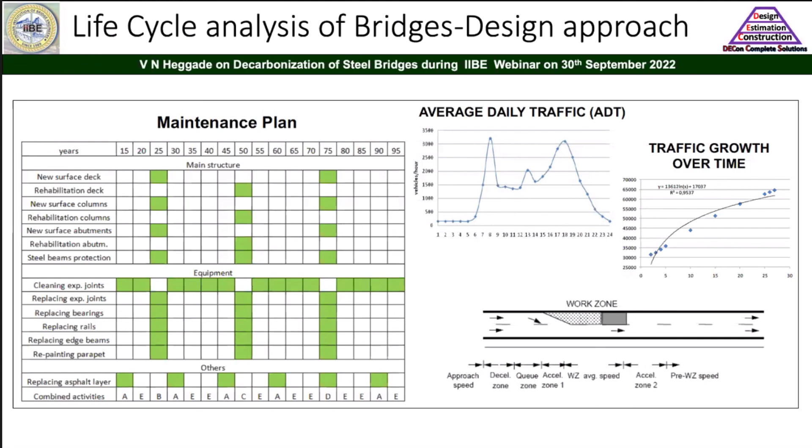If it is not properly done, like the accident which took place recently when our Cyrus Mistry was traveling, it was said that the signages were not designed and it was not designed properly. That is why the accident took place. All these things have to be calculated and assessed in the life cycle assessment cost, as well as the life cycle assessment of the carbon.

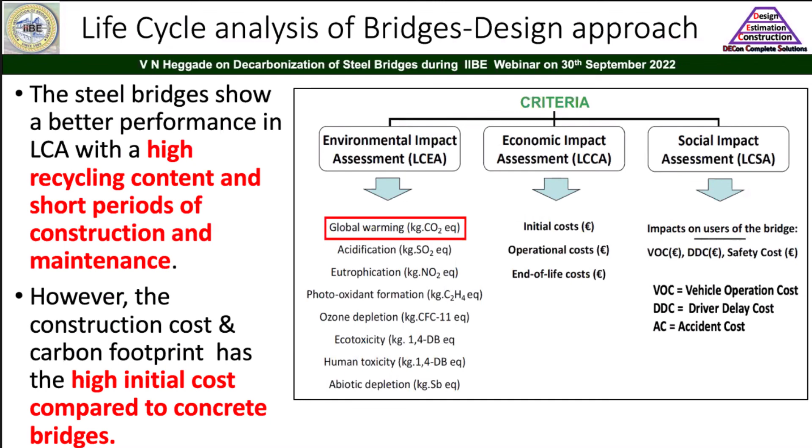In fact, I explained about this environmental impact. Apart from global warming or the carbon dioxide emission impact, under the environment impact assessment, many things have to be studied. But at this stage, I think it's enough for us to study global warming. Of course, in the economic impact assessment, the initial cost, operation cost, and end of life cost have to be calculated. For social impact, the vehicle operation cost, driver delay cost, and accident cost have to be calculated when you are doing the life cycle analysis, as you can see here.

It is just a broad view on the life cycle assessment, how it can be done. A lot of research is going on all over the world, in fact, and we can take cues from there. In fact, the responsibility of giving a guideline on the life cycle assessment is with Dr. Harshavardhan Subbarao. He has been collecting a lot of information, and we'll have to come out with the life cycle assessment calculator for both the economic model as well as the global warming model, that is, the carbon dioxide emission model.

In conclusion, I would like to say that if you really look at the analysis which I showed here earlier, the embodied carbon of the steel which has been used in the bridges is around 63 million tons carbon dioxide equivalent being emitted to the environment. This 63 million tons of carbon dioxide emission has to be brought to zero, as committed by our Prime Minister, by 2070. All of us have to do it.

From the structural engineering fraternity or the civil engineering fraternity, I can assure that through design efficiency, circular economy, as well as transportation, fabrication, and erection, it is possible for us to bring this down to zero by 2070. But my worry is that 70% of the embodied carbon is due to the embodied energy. When I say embodied energy, as you can see here, 45 million tons of carbon dioxide emission is due to the energy used in producing the steel. Basically, 162 million gigajoules of energy is required to produce this steel.

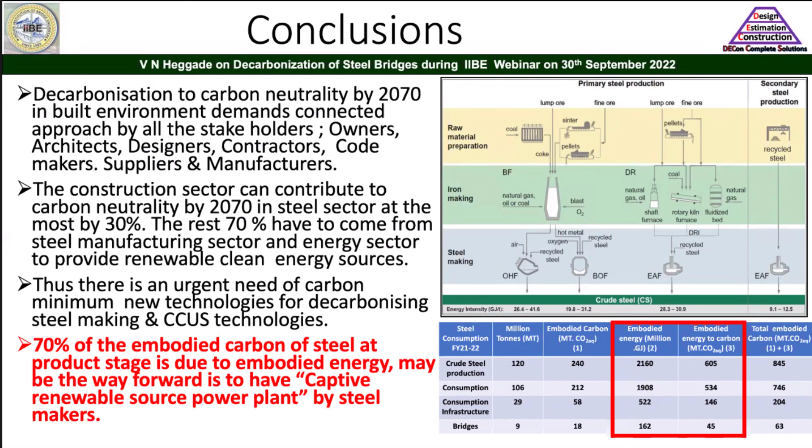Once they replace it, I think CCUS is working very well, in my opinion. They are converting much of this captured carbon into ethanol, which is going to be mixed with the petrol being used right now. And similarly, it can be used in other places also. That industry is working very well. The only way to go about it is, we have to insist upon our steel manufacturers to have their captive power plants, so that they get this energy from renewable energy sources.